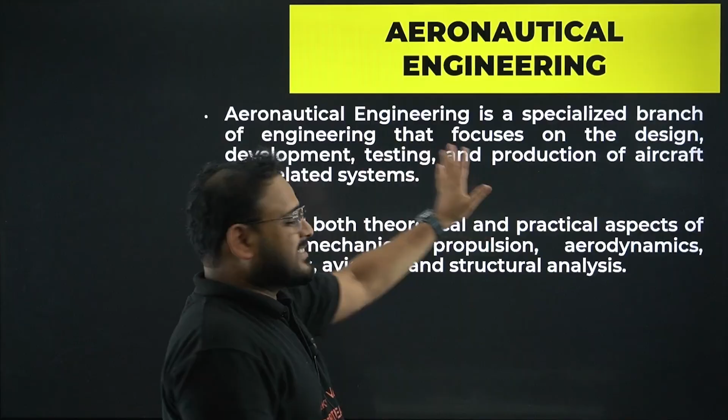Mostly the things are with respect to the aerodynamics, the stability of any aircraft which is flying, or any device which is flying. All of that will be discussed and learned in this part. Basically, from the design till the production, testing - all this is studied in this course of engineering.

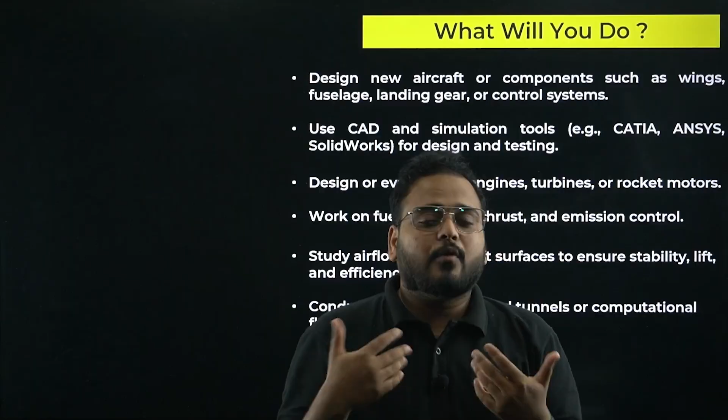Let's say if you are an aeronautical engineer, what will you do? So you will design new aircraft or components such as wings, fuselage, landing gear, or control systems. Because as a student, we want to know what is my end goal after I finish this course, what I'm going to be working with. So the answer is: use CAD and simulation tools like CATIA, ANSYS, SolidWorks for design and testing.

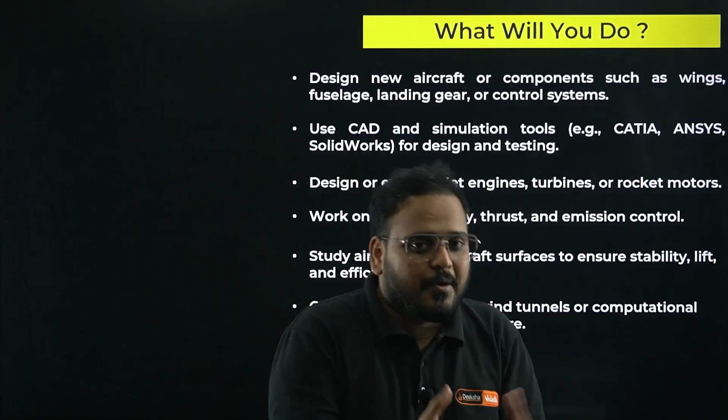So a lot of things that you see around you have to be designed first, tested first, whether the design is suitable or not, whether it can be sustained or not. All that has to be done as an engineer. But don't worry, you'll learn it in the program that you take up - design or evaluate jet engines, turbines, or rocket motors, work on fuel efficiency, thrust, and emission control.

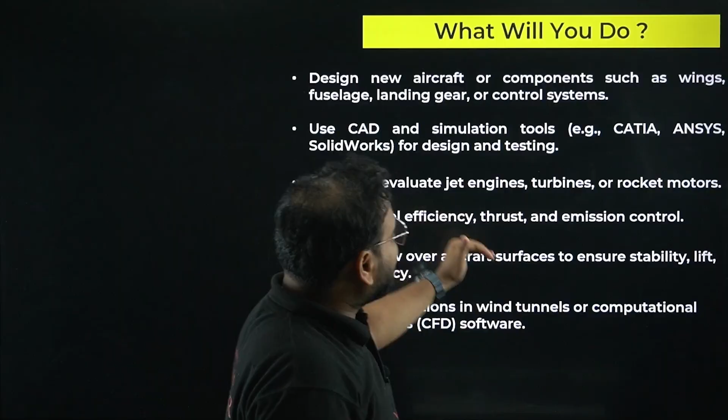Again, study airflow over aircraft surfaces to ensure stability, lift, and efficiency. These are very high-tech terms that might look very fancy right now, but once you get into the course, it'll be much easier to understand. Conduct simulations in wind tunnels or computational fluid dynamics - CFD - softwares.

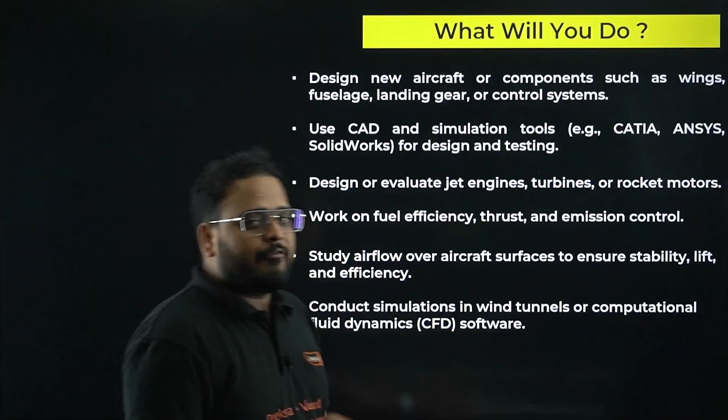So this is the profession. Basically, if you are an engineer from this stream, that's what you're going to do. Some of the things I've taken, not everything of course, but just to give you an idea.

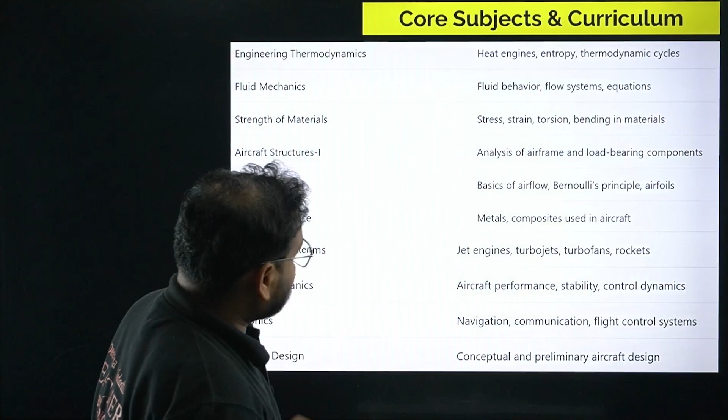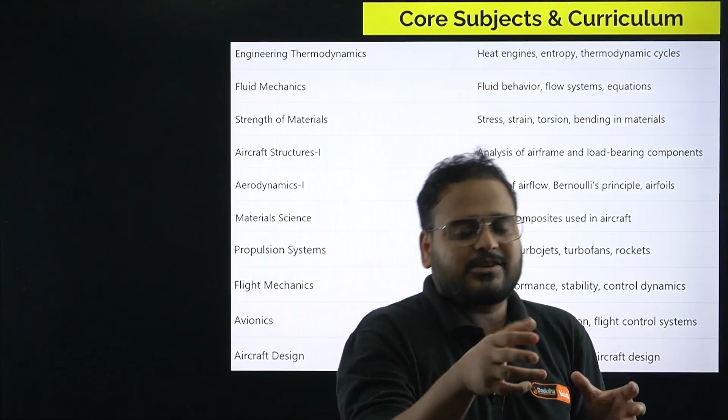Moving on to core subjects and curriculum. I've not taken all of them but I've tried to give you some subjects to give you an idea. Engineering thermodynamics covers heat engines, entropy, and thermodynamic cycles. You learn a few of these things in mechanical engineering as well, but after the first step of mechanical, you move to aeronautical. Aeronautical is also part of mechanical engineering in a way; mechanical is a general engineering stream, whereas aeronautical is a more specific stream of engineering. So even this part you learn in mechanical, but it is also there in aeronautical.

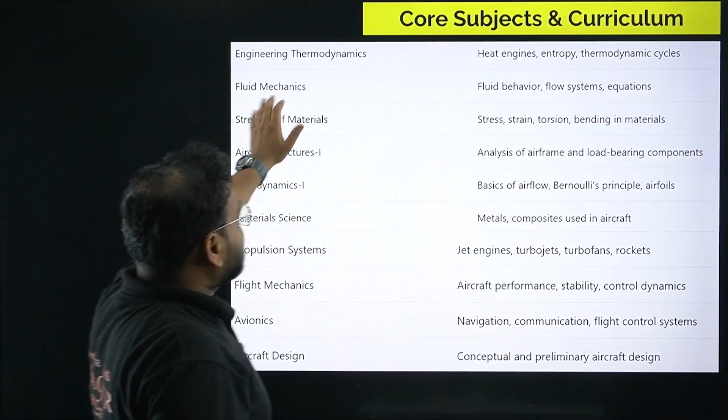Next is fluid mechanics: fluid behavior, flow systems and equations, whether we're talking about water, other fluids, or air as well. Fluid mechanics is very, very important. Then SOM, strength of materials: stress, strain, torsion, bending of materials. Don't worry about these things right now, you'll learn it once you choose the stream.

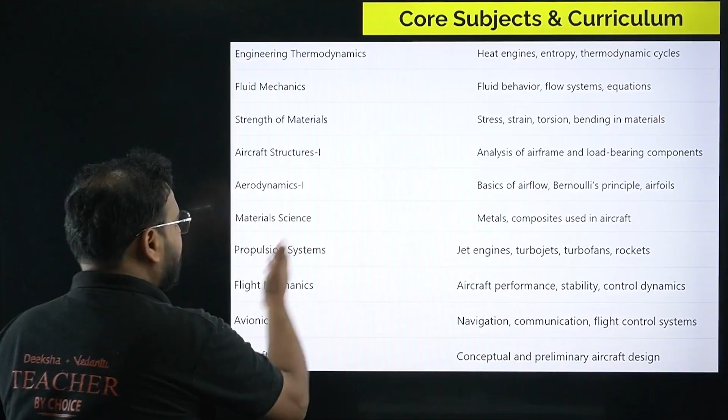Next is aircraft structure 1. There are more than one subject like this; let's say semester 3 covers part 1, then part 2 comes in semester 5, that's why it's written as 1 and 2. Aerodynamics is also there: basics of airflow, Bernoulli's principle and airfoils, material science, and metals and composites used in aircraft. Again, you need to choose the right materials for the aircraft, otherwise it will not function properly.

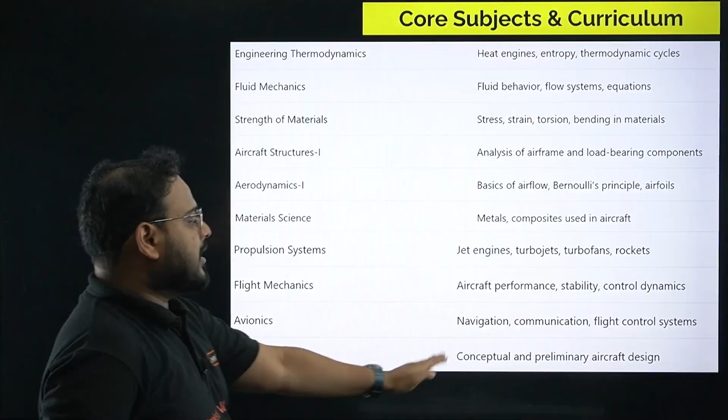Propulsion systems covers jet engines, turbojets, turbofans and rockets. Flight mechanics covers aircraft performance, stability, control and dynamics. We have avionics as well: navigation, communication, flight control systems that you learn as subtopics within the entire aeronautical curriculum. Aircraft design covers conceptual and preliminary aircraft design. I hope this is clear.

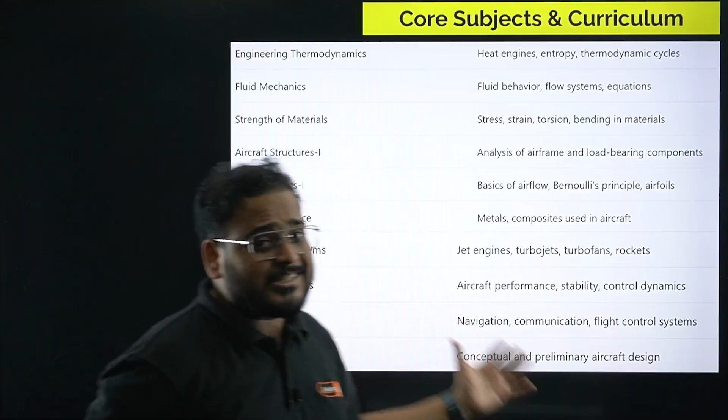So just to give you an idea of the core subjects and curriculum, how it looks like - if it fascinates you, this is the right choice of stream for you. Moving on, some more subjects and curriculum: aircraft systems and instruments, hydraulic, electrical, landing gear systems.

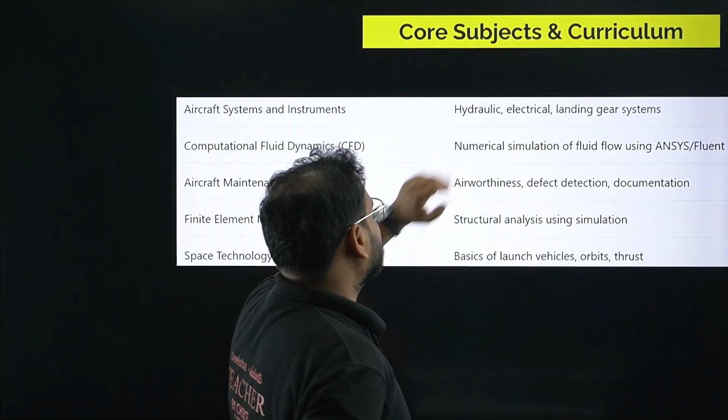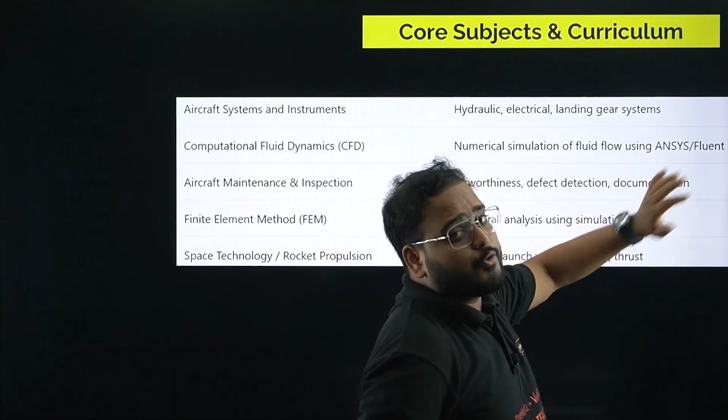We have CFD as well, computational fluid dynamics, numerical simulations of fluid flow using software like ANSYS. Aircraft maintenance and inspection covers airworthiness, defect detection, documentation. And finite element method, FEM, structural analysis using simulations. This might be very advanced to you right now, but I'm just giving you an idea.

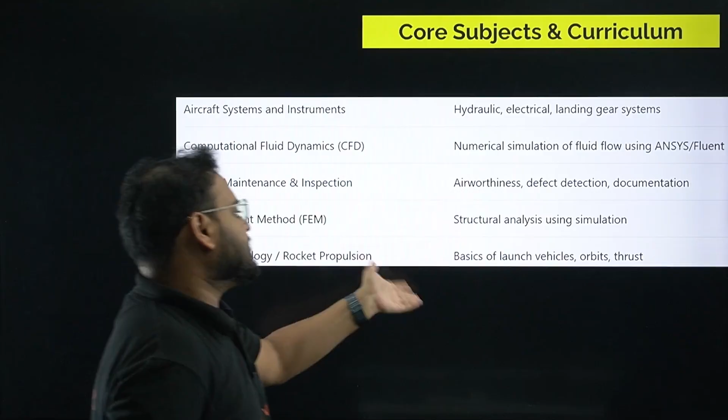Space technology covers rocket propulsion, basics of launch vehicles, orbits and thrust. So this is just to give you an idea of the core subjects and curriculum, if somebody is a little informed about this by looking at certain videos or movies that talk about these kinds of technologies. Let's move on.

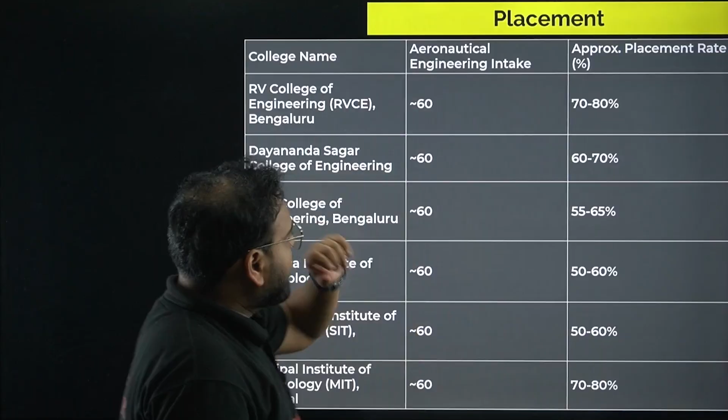If you check, seats are around 60 each, and the approximate placement rate is 70-80%, or 60-70%. This is an online resource, not taken directly from their website, so you have to cross verify this data. I wanted to show you this, but please cross check it before relying on it completely, and before making the decision of aeronautical engineering.

You can approach the college directly, they'll give you proper data. You can call them using the number on their official website, or visit them to get their number of seats and data if they actually disclose it. I don't know whether they will disclose it or not, but try it. If you want to get selected for these colleges, you'll have to make an effort for that.

But this is the data that I got online. Please verify it before making a decision, for all the colleges I've given you over here for placement.